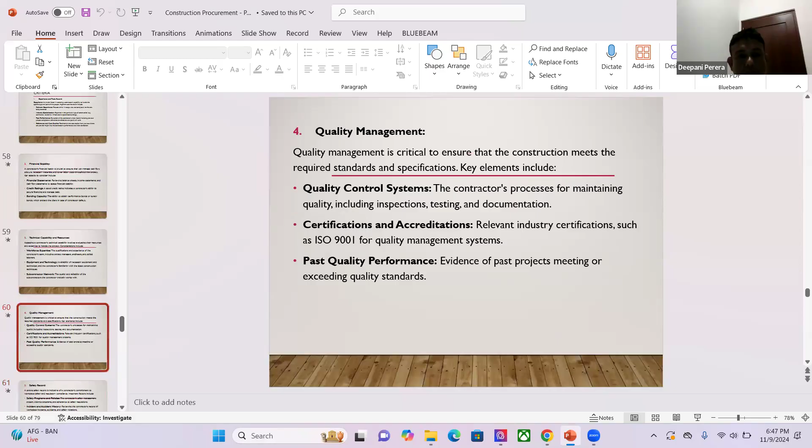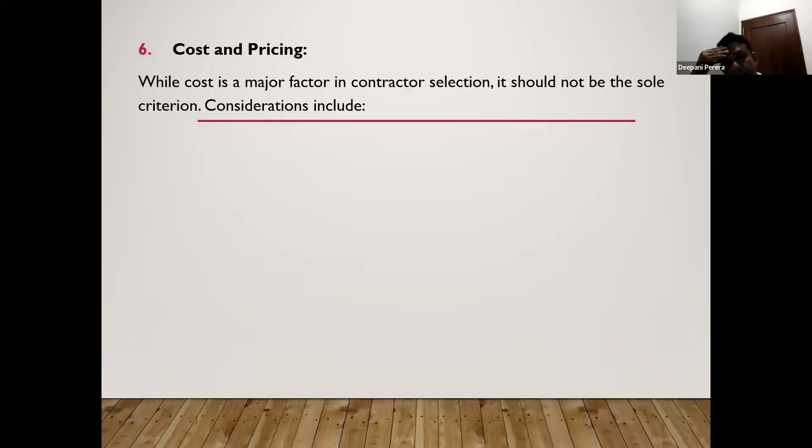So we will discuss the selection process of the contractors. These are the typical process. First, you have to pre-qualify your contractors. For example, some of the contracts.

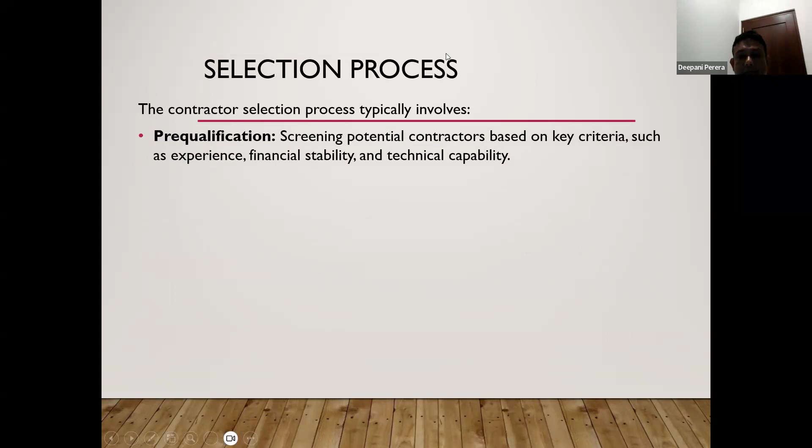You can listen to me, no? Yes, sir, we can hear you.

So in some of the contracts, you have to pre-qualify whether you have sufficient technical knowledge or capacity to deliver the project. Not only technical, but financially also you have to pre-qualify to do the projects, and also similar kind of nature project. So in some of the tenders, first you have to pre-qualify the contractor.

So therefore, financial stability, financial ratios, especially you may go through account ratios, liquidity ratios, liability ratios, asset ratios. You have to consider those things, financial stability, before awarding the project, and also technical capacity.

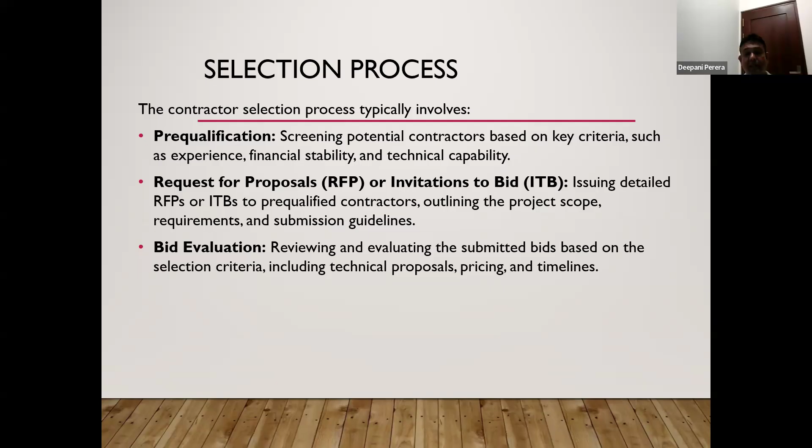Normally, with the bid, you have to submit a guarantee.

So the tender-wise, normally all the contractors after submitting the bid, evaluation is done. Normally in open tenders, the prices are exposed in the bid opening meeting. They will expose who are qualified by considering the bid bond and required documents. But anyway, bid evaluation is done during the technical evaluation as well, because the evaluation board has to sit together, review certain technical requirements and the price, and based on the technical proposal, they will evaluate the successful bidder.

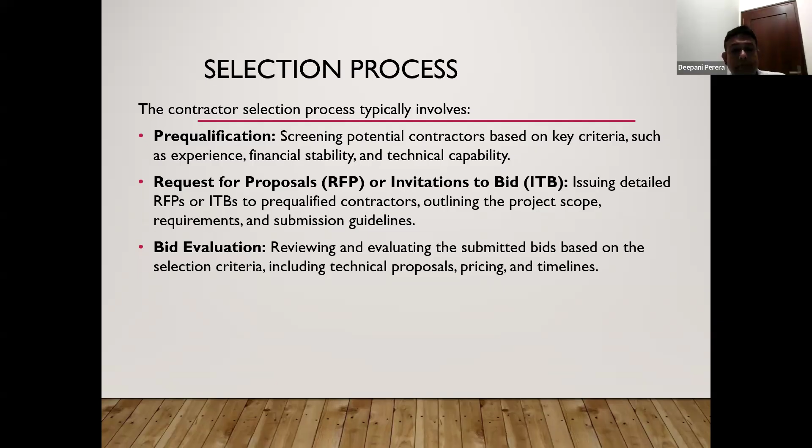Sometimes, most of the cases in private tenders, there are so many interviews and negotiations. This happens to negotiate the prices and also to get alternative methods. But most of the cases, it's recommended not to do any contractual agreement or contract changes; pricing negotiations can be done through negotiations and interviews.

After final selection, normally a letter of acceptance will be sent after confirming the final successful bid.

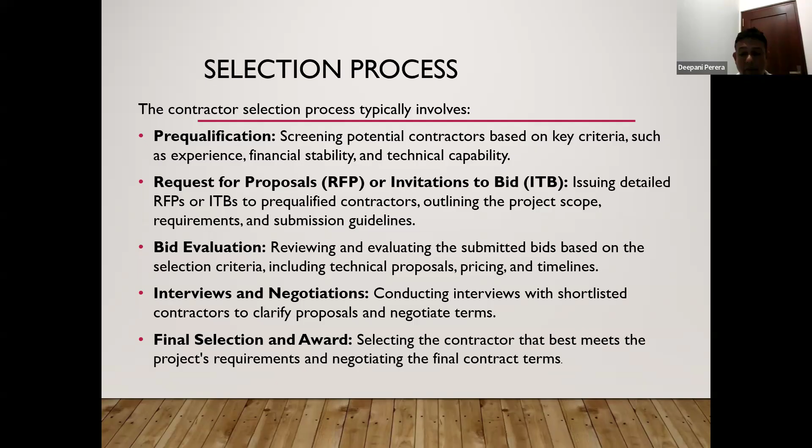Conditions in the procurement process: fair competition. What is fair competition? When you are getting the bid or quotation or calling for tender, you should have a fair number of similar capacity competitors. Otherwise, you can't get good, accurate bidding.

Integrity and transparency: all the details should be given to all the contractors in a similar manner. Call for the pre-bid meeting and give a detailed discussion with the bidders and share their comments. If some contractors ask questions through emails, they have to write in, in writing, to get the clarification.

Once the clarification is given, normally procedure is given to all the parties. Confidential - all the details from each bidder should be kept top secret, not exposed to others during the procurement process. And accountability - there should be accountability of the organization to keep it, and social responsibility, especially in government projects, to do a proper procurement process.

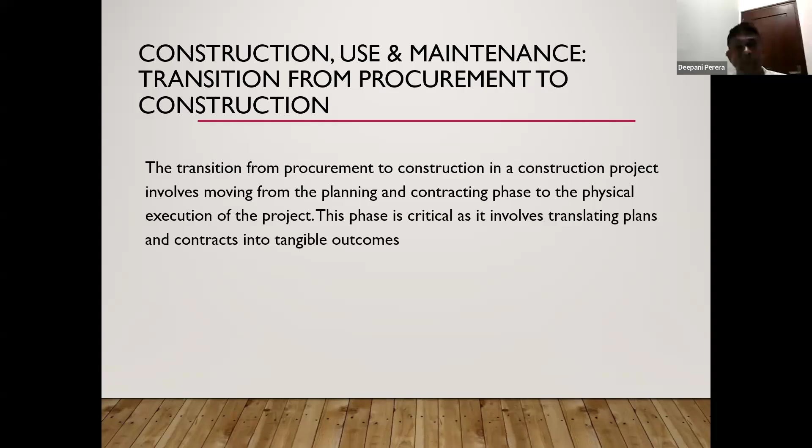Normally all construction agreements are considered as contracts. So anyone know what is the definition of the contract? Can anyone tell that? Manam Peruma? What is the contract? How to form a contract?

So not answering. So like this, you all are in the class, no? So, to form a contract there should be two parties, offer and acceptance in law. We offer and accept, but not only the offer and accept - there should be another important part: consideration. Correct, good. So to complete the contract, it should be offer, acceptance, and consideration. That is the normal way to form a contract.

So main contract - there are several contracts in construction procurement. Normally we call it the main contract, that's the primary agreement between the employer and the contractor. In this contract, normally we mention the scope of work, payment terms. There are implied terms as well, and the condition of contract, schedules, specification - all are included in the main contract.

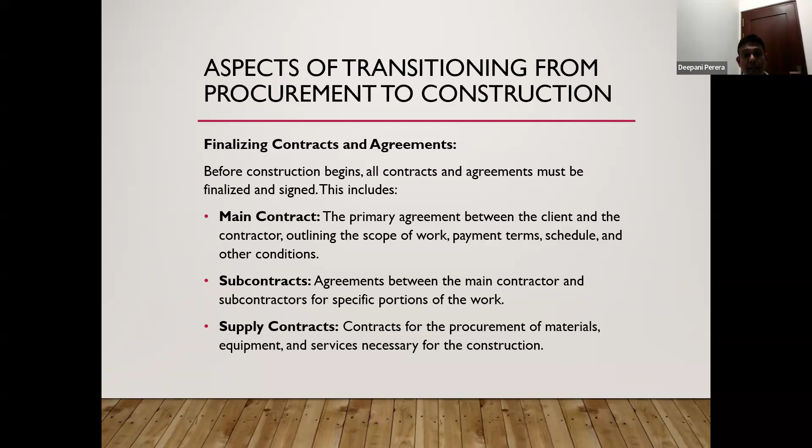Pre-construction activities - these are the basic things. You have to go through site preparation first. Before that, before tendering, you actually have to get the permit and approval. Without that you can't do tendering because sometimes the scope can change, but permit and approval should be in place. Site preparation should be done, and also the mobilization - mobilization means the contractor is going to site to start the work.

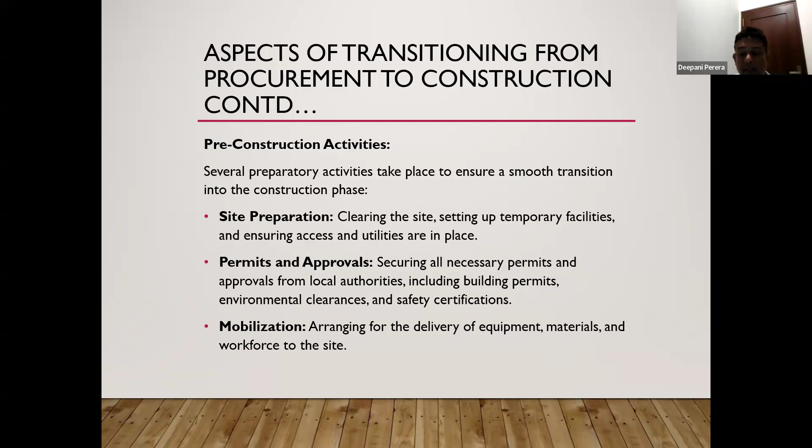Stakeholder engagement - there are so many stakeholders engaging in the construction project, such as the client and contractor coordination.

The contractor is liable to deliver the project, so therefore there should be proper communication between the client and the contractor and the project managers. Project managers or consultants facilitate the relationship between the client and contractor.

And community engagement - informing local communities about upcoming construction activities and addressing any current impacts. There are so many environmental concerns, especially sound restriction concerns. If you are doing a factory, there will be environmental factors. If you are doing a mall like Havelock City, you have to do the traffic impact assessment, because there can be traffic violations in front of the road and in front of the premises. So it's good to inform the local people before doing the construction work.

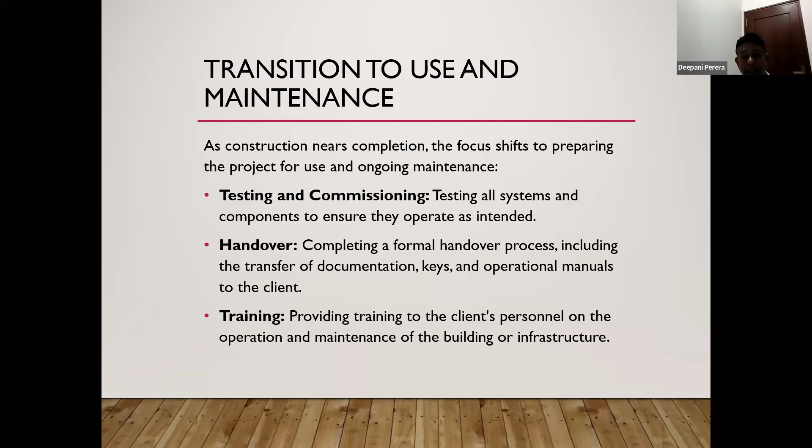Post-construction activities include the defect liability period. You know that for any product you have to give a defect liability period - a warranty - so if any defects occur due to construction, you give assurance to rectify them. The defect liability period is a period during which the contractor is responsible for correcting defects.

Normally this is 1 year. If you want, as per the contractual requirement, you can extend the defect liability period, but commonly it is 1 year, for the longevity and optimal performance of the facility.

So maintenance - generator, etc. After the 1 year, you have to do a final review and close out the project. You have to calculate the defects and missing or lagging work, and based on that, review the final outcome and conclude the project.

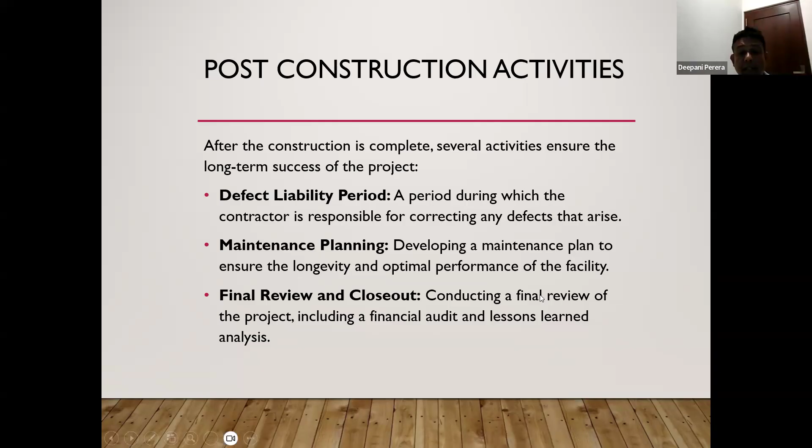Use phase and operational consideration. The use phase, also known as the operational phase of a construction project, refers to the period after construction is complete and the facility is used. This phase involves ensuring effective and efficient operation, maintenance, and management - after the defect liability period, the owner has to operate the building. That is an important part.

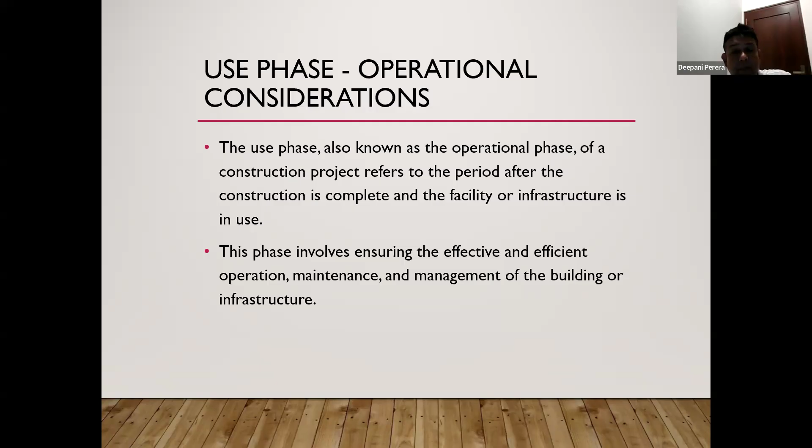Most apartment buildings have companies doing these management things - we call it maintenance, providing security, cleaning, putting oil in the generator. We call this facility management. You can see a lot of facility management companies doing maintenance work at the World Trade Center, Lotus Tower, Havelock City, and many other buildings.

I'm not sure about roads, but road maintenance work is normally done by the RDA. So day-to-day operational and maintenance work is done by the facility management team. They basically oversee daily operations as per requirements, and also building service and building system management.

Building system management means some buildings have centralized AC, which they have to monitor - maintaining carbon dioxide content and indoor air quality. For that you need qualified engineers or maintenance engineers to maintain it.

Also lighting systems - in the Lotus Tower, for example, the lights change. You also have to install energy-efficient lighting inside the building, and check whether they work properly with motion sensors - if not, you have to maintain them.

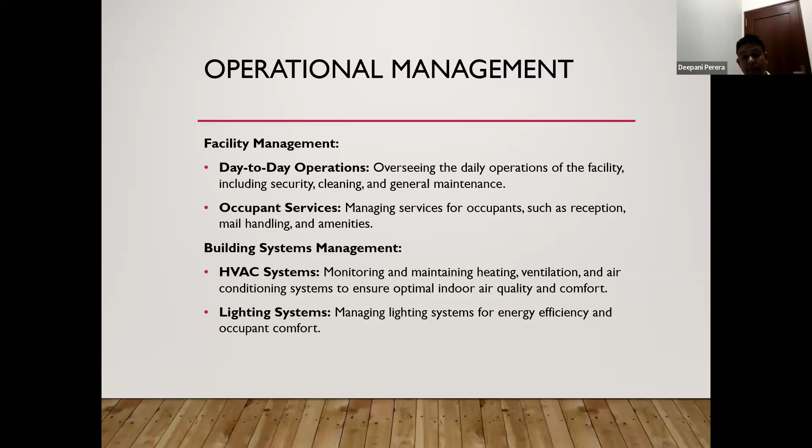Preventive maintenance - as I said, scheduled inspection, especially for lifts and generators, requires scheduled inspection. Routine services - you have to change things like vehicle parts, cables, and even replace lifts after 5 to 10 years. Sometimes you have to change the cable as well.

Also corrective maintenance - what is corrective maintenance? Repair works - if there's any repair needed, you have to do it. And also upgrades - sometimes the system may need to be upgraded.

For example, tell your pump is 10 horsepower. Sometimes you need to cater for adding pipe outlets, and you have to cater for 15 bar, so then you have to upgrade the motors.

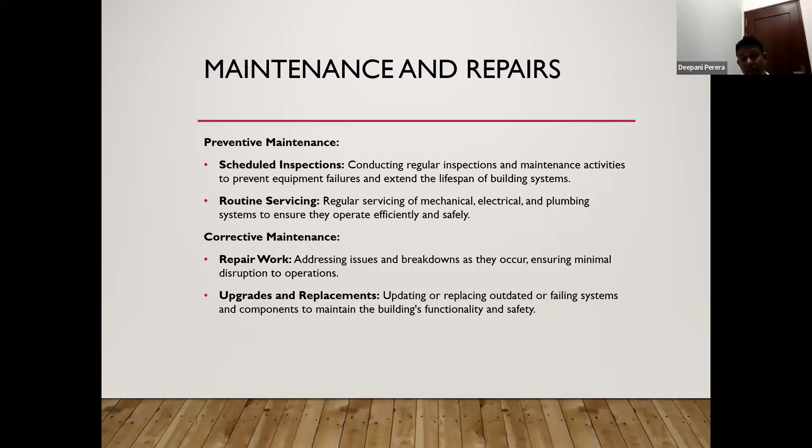Energy efficiency is part of sustainable energy management and sustainability, which is very important in buildings. You have to monitor energy use. Sustainable practices include waste management and water conservation - for example, you have to use rainwater for the irrigation system, recycling, etc.

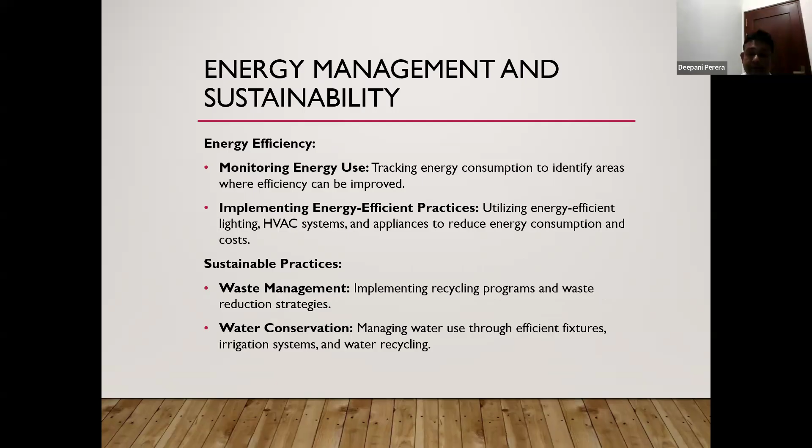Health and safety inspection involves conducting regular safety inspections to identify and address potential hazards, for example some oil leaks.

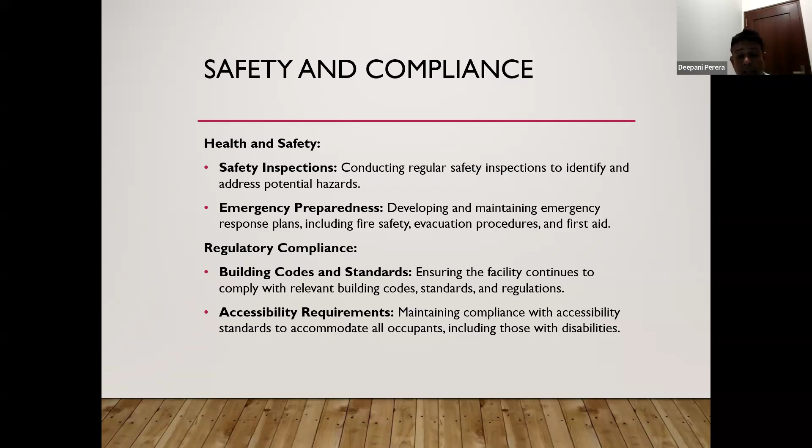Also regulatory compliance, building codes and standards. Sometimes, for example, fire standards may be changed, but based on the required law change, you have to change it. Also there are different gazettes for the disabled, so accessibility requirements are most important when considering compliance.

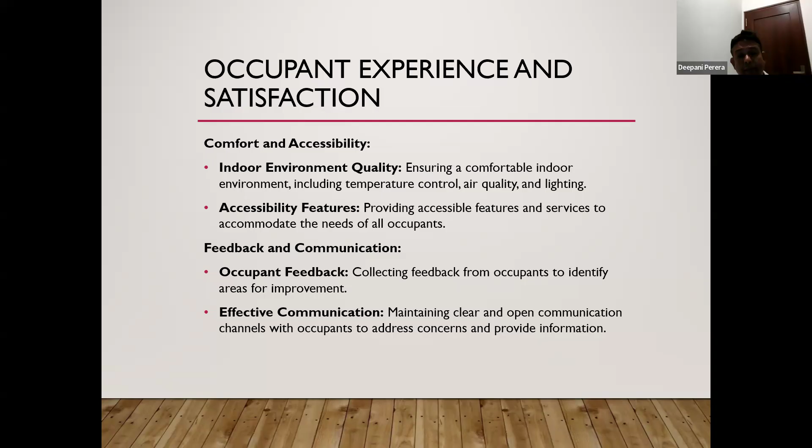Comfort and accessibility: indoor environment quality should be perfect. Accessibility features mean providing features and services to accommodate the needs of all occupants. Also it's better to get feedback and communication from the end users.

So that's the first part. We covered basically these contents, and now I want to discuss your assignment.

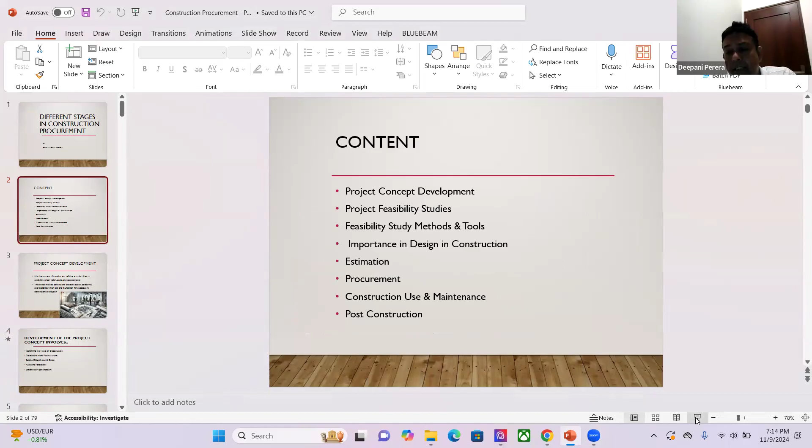I will base your assignment on the project proposal, which expects a private company to implement it in the future. In that case, you have to...

write an individual report considering project concept development, and also critically discuss the feasibility studies and which kind of contract they should go for and how to procure the project.

So that will be our assignment from my side. Basically, you have to write around 1,000 to 1,200 words considering the proposal.

Maybe it will be for a service building or an apartment. I haven't decided yet, but basically you have to write especially the concept development considering the client requirement and other third party constraints as well.

So it's not just about how to implement the project, but also which kind of contractor you're going to procure. Your decision and conclusion will be like that.

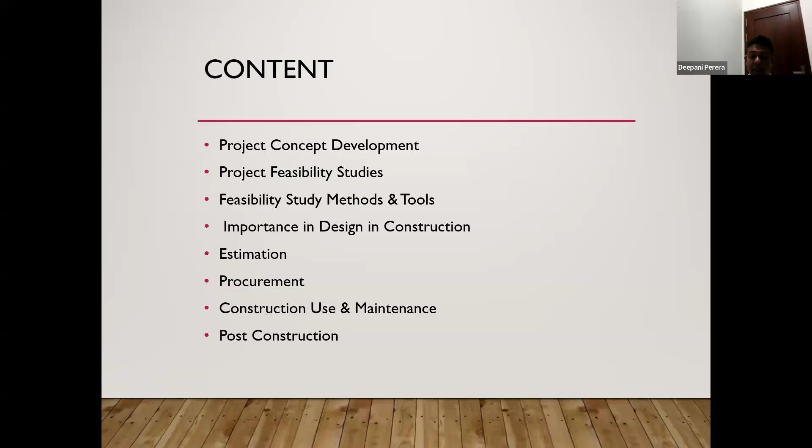Okay, we'll go to part 2.

Documents related to construction project design. What are the documents you know for the construction project?

Maheshi? Drawings, specifications, agreements, MOU, LOA. Right, good. So those are the documents related to construction projects, but how does it come from?

Normally, it should be a project brief and scope document. As I say, normally the client's vision or objective is defined first from the project.

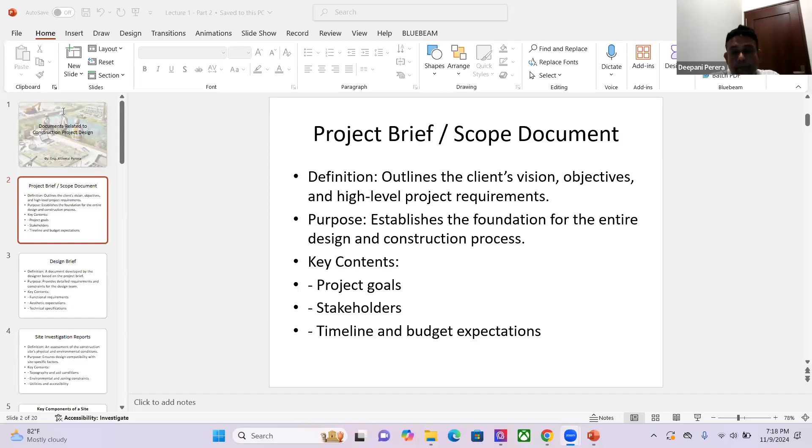As I said, the client gives the requirement objectives. Based on that, the consultant or design engineer establishes the project scope. In this project scope document, project goals are most important, along with who the stakeholders are, and the timeline and budget expectations.

Project goal means, for example, one hotel client, a hotel investor, wants to build a hotel on top of a railway station. Then there will be a lot of stakeholders: designers, the railway department, road development authority, and on the design side, engineers, project managers, architects, quantity surveyors. They are the stakeholders, and also there are suppliers and subcontractors.

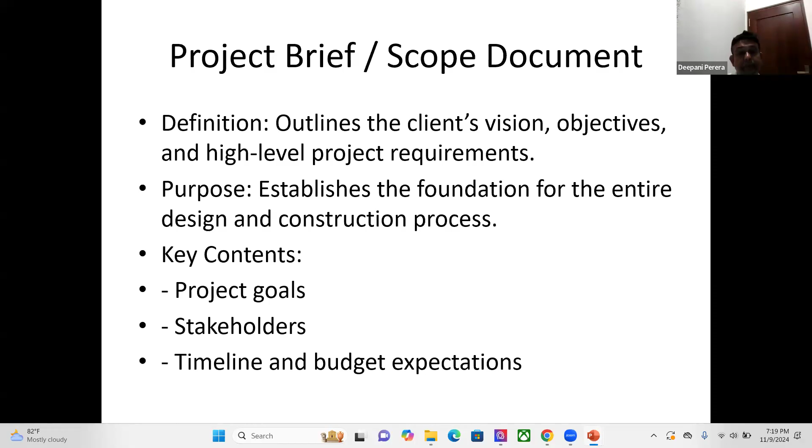What is the design brief? This is a document developed by the designer based on the project brief.

For example, recently I visited one of the private organizations to do the office building for them. I went there with my architect.

Earlier we had a small discussion with them. They said they need 6 car parks, and they said they need 4 floors for the office. So based on that, as designers we have to prepare the document for the developer, and develop the design brief on how we're going to allocate these client requirements.

So the purpose is to provide detailed requirements and constraints to the design teams. For example, the constraints: in that discussion they said you can't go for the basement, because there are 2 old houses there, so you can't build the basement. Constraints like this you have to mention to the design team.

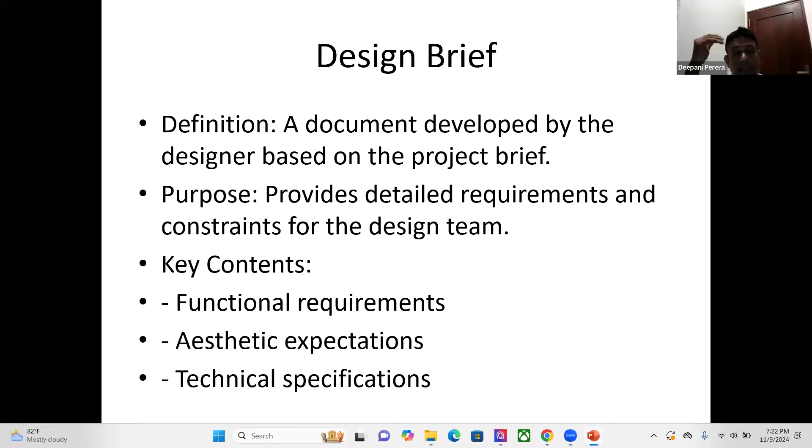Sometimes, as I said, they will give technical specifications. Especially, for the Lotus Tower, they said they need high speed lifts in the country. Likewise, they give special technical requirements for the project.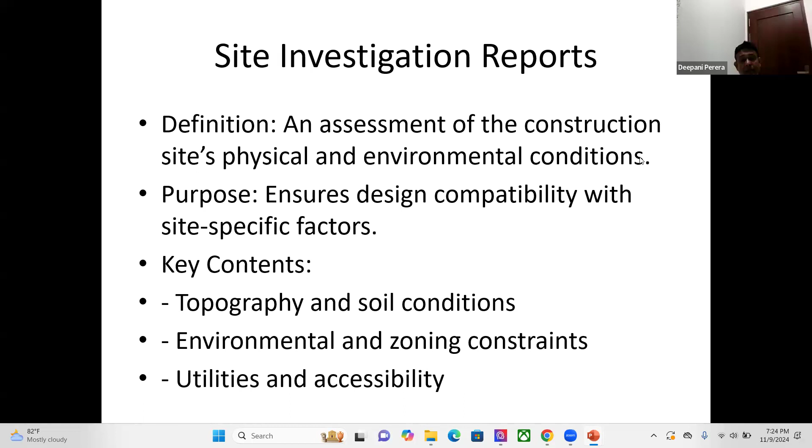Planning clearance - do you know the PPC? Anyone know about the PPC? What is the preliminary planning clearance? Before you do the designing, you have to know about this.

For example, think about you have a land facing near the airport, land in some special location, then you have a different frontage of the land - what is the width for the face into the road. These kinds of factors are affecting the construction of the building.

So before you do the designing, the normal procedure is architects get the preliminary planning clearance by applying through the UDA. They will give how many stories based on your plot ratio, road frontage, construction area, and where the proposed land is situated. Based on these, they will give clearance for how many stories you can do, and how much setback you have to keep. Likewise, these are through the PPC.

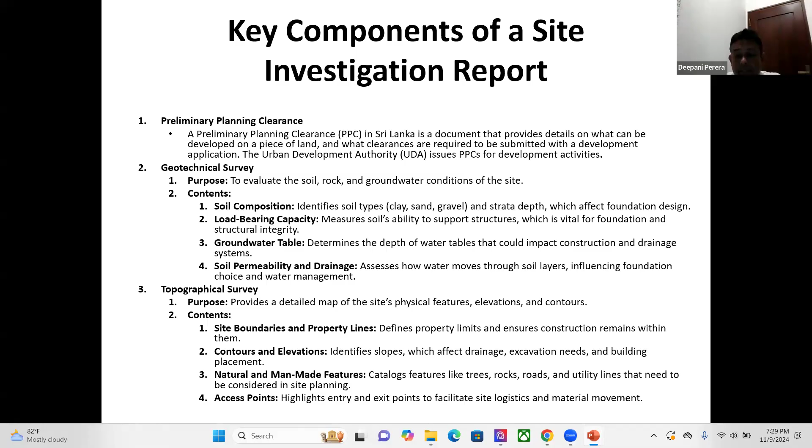Environment assessment - anyone know about the environment assessment? It ensures that the project complies with environment regulations and reduces environmental impact. Most mega projects require an environment impact assessment. This contains existing flora and fauna, identified vegetation and animal life, and could require preservation or relocation. As I said earlier, we have done the Hilton Yala project.

In that project, we provided an elephant path to move the wild elephants, and also we made ponds for them to drink water, and we cultivated trees because we cut a few trees, but did not cut the root ball - we removed them from one side and relocated them to another.

And especially in the factory building, noise and air quality assessment, you have to do. In the hydrological survey, especially hydrological survey is required for the power plant, mini hydros, you have to do that. Surface water flow, flood risk, drainage system, etc. you have to do.

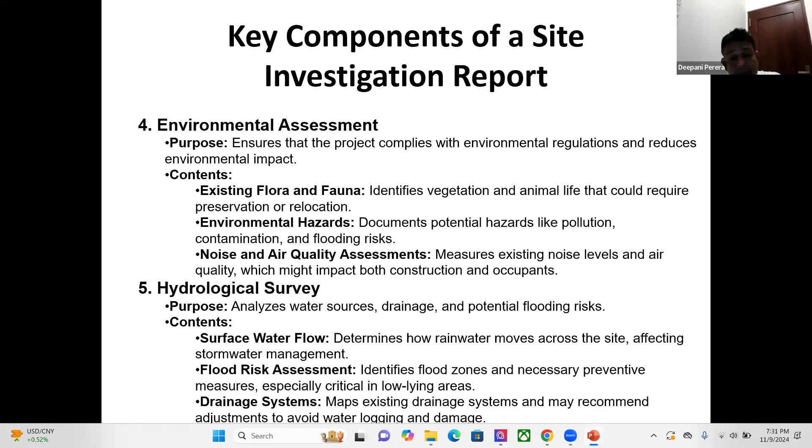In hydrological survey, especially in that mini hydropower project, you may know that you have a culvert, tunnels, channels, and a forebay tank, powerhouse. So those should be located based on the hydrological survey, because of the flood levels it can be damaged. Based on that proper analysis, you can construct those activities.

And the other thing is historical and archaeological studies. The purpose is to identify any historical or archaeological sites that require protection. You know that in one project, near there was a building - earlier City Police was there. That building was an archaeological, more than 100 years old building. So we cannot remove that one. In that case, we have to protect that building.

And also we have to consider that as a design. So the 3 towers were constructed without disturbing that. So the piling also designed not to touch that historical building.

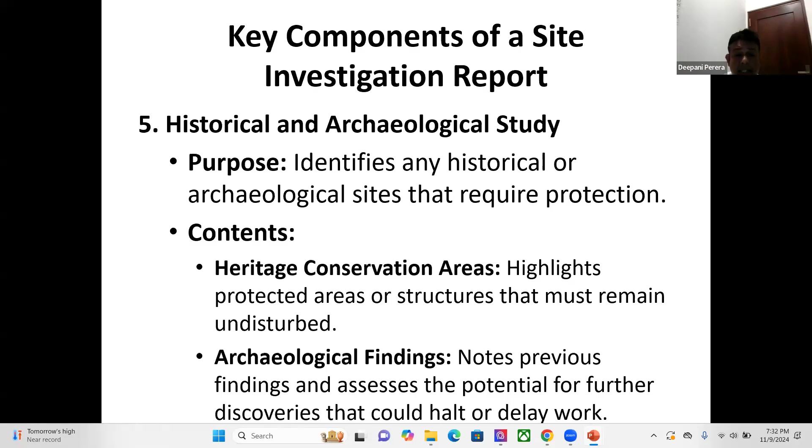So the heritage conservation area highlights protection, especially when you are doing structures in Anuradhapura, Sigiriya, you have so many restrictions. Archaeological findings, especially when you are doing excavation near the heritage archaeological area, you have to take special care.

So what are the benefits of investigation report? First thing is risk reduction. It's very important to identify the risk. For example, as I say, identifying the rock.

In the Colombo Lotus Tower, we have done around 20 boreholes to identify the rock level, because in the Lotus Tower project we have to excavate the tower foundation up to the base. So to do that, we should have proper identification of the rock. With the site investigation report, we got enormous details on how the rock is under the soil.

So that is one thing. Other thing is there can be unexpected boulders, rock. For example, when you are doing the tunnel project, there can be rocks at a very shallow level. Then you have to blast - those will be extra cost for the project. So to identify these things, site investigation reports are much vital.

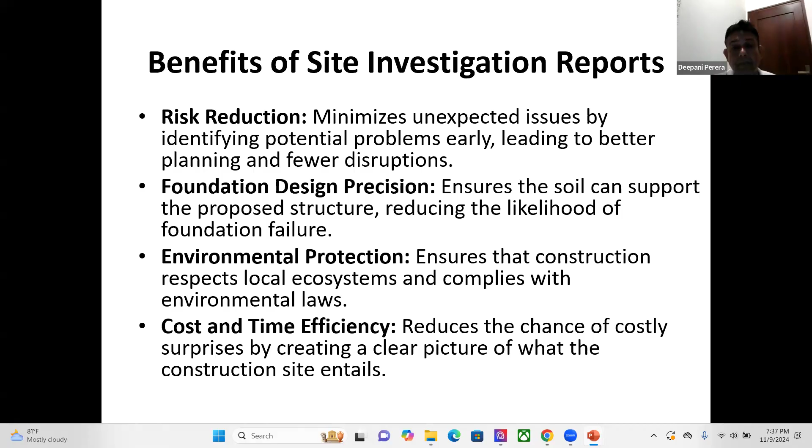Application in the design and construction. So basically this is...

Based on the site investigation report, you have to identify what is the foundation design. Basically, with the site investigation report and soil investigation, you have to design the foundation based on which kind of structure you're going to construct.

For the road, you are going to do the construction of a road. Then you have to identify which kind of fillings are needed to accommodate the highway. Likewise, the site investigation report is more important to identify the soil condition, and based on that, foundation and structural design will be done, especially the foundation. So foundation design will be done using the soil investigation report.

Drainage and landscape, as I said, in the Nuwara Eliya area or Nuwara Kandy area, topographical and hydrological survey help design effective water management and landscape. So landscaping outside of the building, how to do the designing, that topographical survey is most important.

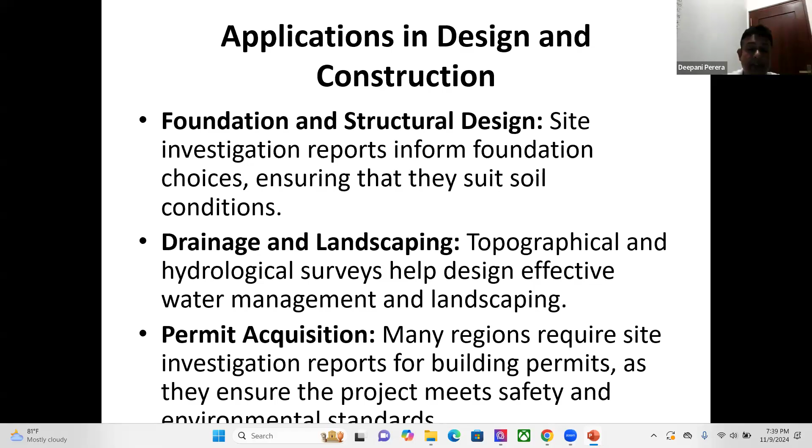So, feasibility studies. It's an analysis of the project viability in terms of technical and financial feasibility. The purpose is to determine if the project is achievable within the defined constraints.

You know, say I am going to do a construction with 100 million. Because of the site investigation report, I have to do soundproof walls around the building, and also the foundation should be a pile, not a raft or individual footings. That will be a huge cost. So then we need the feasibility study. It's important technically and for financial feasibility as well, because technical feasibility directly impacts financial feasibility.

The key contents of the feasibility study are the cost estimate, risk assessment, and financial and timeline forecast.

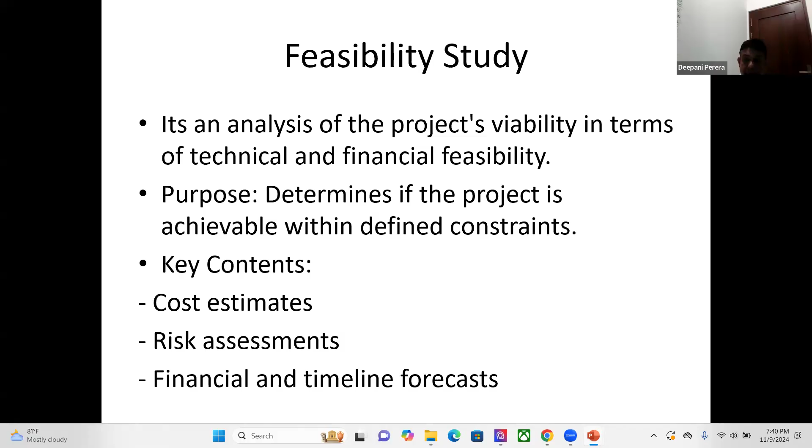They are doing sketches, not 3Ds. Nowadays, a lot of new architects are doing 3Ds. Earlier they did sketches for the project, and the basic requirement is to visualize ideas and refine client expectations. Nowadays you can't just do sketches. You can start from sketches, but you have to give a proper 3D, otherwise the client will not be impressed.

To get client approval, you need 3Ds, you need walkthroughs, you need advanced technology software to create the models. Otherwise, they will not approve your concept. Earlier, most architects would construct a model as well - portable models they are constructing. You can see some architects still doing this.

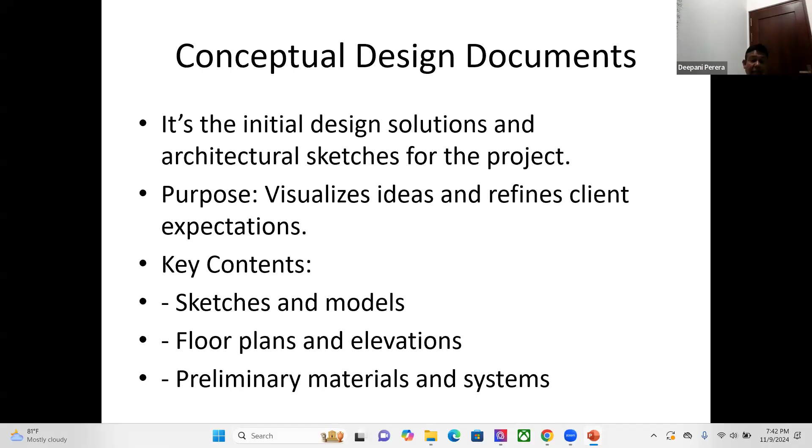So in this document, you have to give the sketches, model, floor plans, elevation, what are the materials. When you are doing hotels, for example with a high quality operator like Hilton, Continental, or Marriott, you have to give material samples - which kind of material for your bed, what tiles for the bathroom, what carpets, backdrop, bed head design, samples, materials. You have to give it and show it to the client before approving.

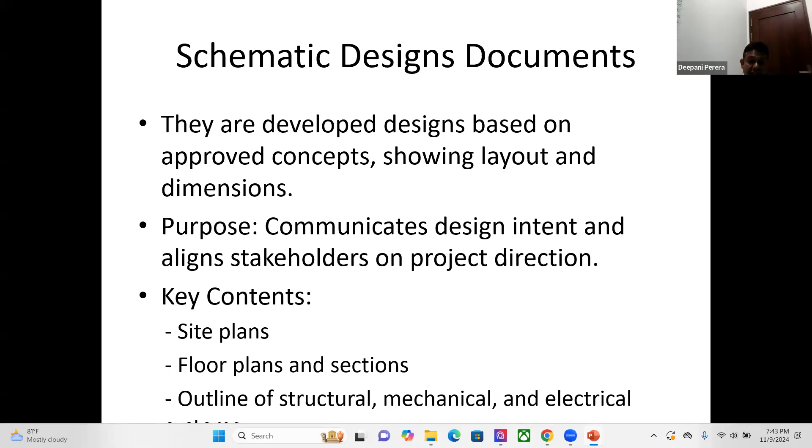After that, you have to do the proper design development document. These are detailed designs addressing specific systems, materials, and layout. This is most important to do the costing for the QS in the tender stage. You need proper detailed design, including specification, system, material, and layout. The purpose is to resolve major project design issues before the final design stage. The key contents of the design development document are detailed plans, elevation, material specification, structural, and MEP details - what is the slab thickness, beam size, floor to floor height, everything is included in the design development document.

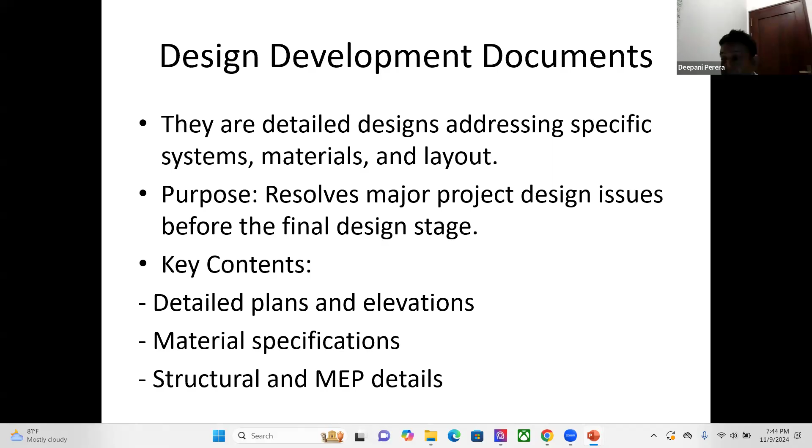After completing this, you have to do the construction document. This is the final document, fully detailed document that guides the construction.

This gives all the instructions for the contractors and subcontractors, detailed drawings, plans. For example, how to lap the reinforcement, how to anchor the reinforcement, what is the anchorage. So many minor details you have to include, like tile grooves and tile patterns. Normally in detailed drawings, you have to give a tile layout as well, material, finishing schedule, etc. You have to provide in the construction document.

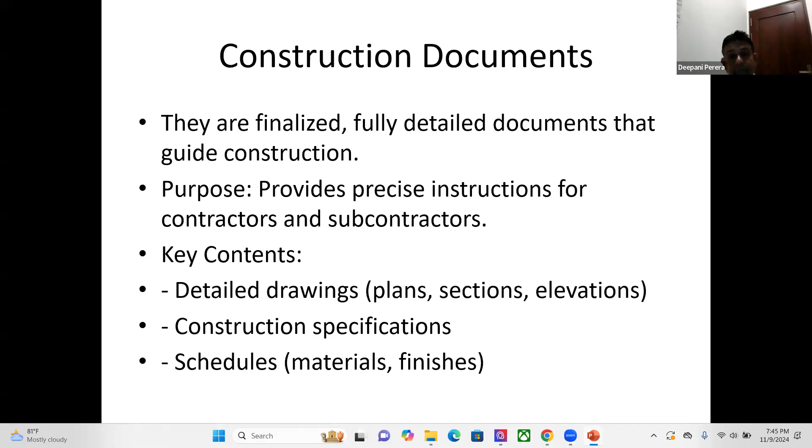What is the specification document? That is another thing, because most of the contracts have the design document, and with the construction document you will get the specification document. Sometimes for a mega project it's a huge book. For the Lotus Tower, the specification book is more than 1,000 pages. So it's a detailed written description of the material, product, and workmanship, the expected quality and consistency throughout the construction.

For example, concrete specifications are given - this test has to be done, this kind of material you have to use, this kind of cement you have to use. In detail it mentions, and based on that the contractor has to perform the contract. So these are the specifications: performance specification, prescriptive specification, proprietary spec.

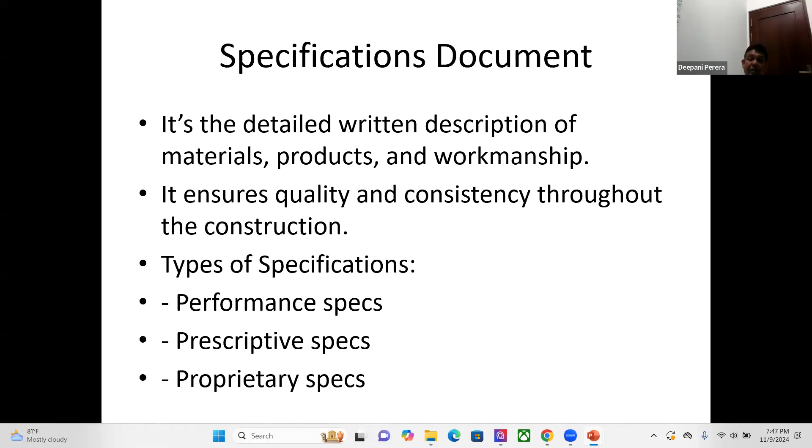What is the proprietary spec? Normally proprietary spec is something like this - you can specify the paint, like a new CIC paint or equivalent. So you give the sample, brand-wise you give samples.

So this is the bill of quantities in the construction document. Bill of quantities is, most of the measure and pay contracts you have a bill of quantities, and also the lump sum contract also you have a bill of quantities to get the idea of the price. Bill of quantities we call BOQ.

So, anyone here from a QS firm? Anyone is QS? Yes sir, I was. Alright, so you are much aware about preparing the BOQs, no? Yes. So it's very important to develop a BOQ, detailed quantities of materials, unit rate, total cost, allowance.

And the provision of sums. So in the bill of quantities, it should be more accurate, but there can be a slight tolerance plus or minus 5%, but it should not affect the major cost components.

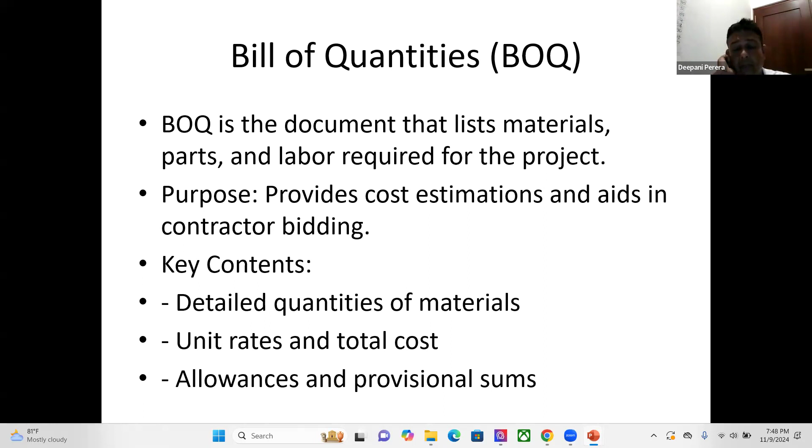So this is a new technique, but actually this is not new now. Most companies are now dealing with BIM models, building information modeling documents.

Recently we have applied to convert the Bandaranaike Airport existing building to the BIM model. So what is the BIM model?

This is a digital 3D model that includes detailed information for project coordination. The purpose is to enhance collaboration and provide a comprehensive overview of the project. So that means it's not like AutoCAD or SketchUp.

So normally for the BIM model you have to use proper software like Revit. Normally I am using Revit to do the BIM models.

This is because all the consultants can work on the same platform. First the architect develops the building, then the structural engineer can do the structural design using his model, then the MEP engineer can do the MEP design. The quantity surveyor can extract the quantities through the model, and also you can get the design visualization.

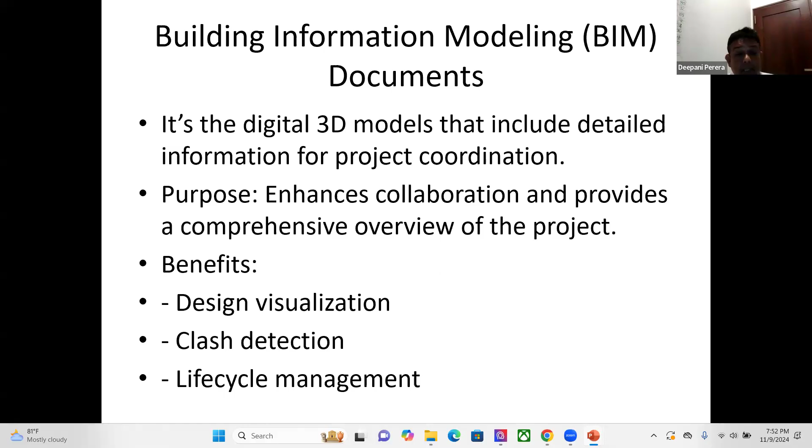Other thing is the regulatory compliance documents. These are the documents you have to involve in construction and design projects, ensuring the project meets local building codes and regulations. The purpose is to avoid legal issues and project delays. For example, nowadays most buildings require sign off from a proper structural engineer, then you have to get approvals from NBRO, UDA, and proper calculation has to be given.

These days NBRO is thoroughly reviewing your excavation retaining system because a few buildings are damaged due to contractor failures and designer failures. To avoid that, NBRO thoroughly looks at the calculation report. This also includes the permits and approvals, environmental impact assessment, safety and accessibility compliance, design calculations, etc.

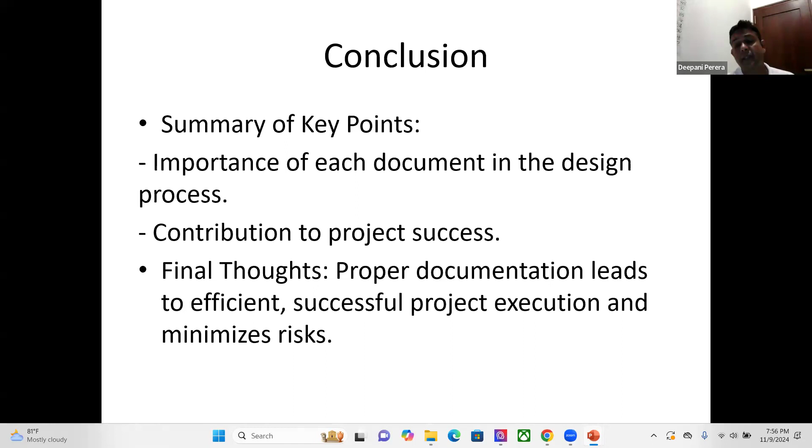So for successful project execution, you need proper documents. That is one of the key requirements because for the procurement stage-wise also you need this document to procure the project.

So any questions on the design documentation related to design and construction project designs? These are the documents - I didn't go through the structural drawings. I assume you have seen all the construction drawings, those are highly technical, but at least you have to know about the structural drawing, architectural drawing, MEP drawing, etc. These are the documentations you come across through the construction period as construction documents. Any question from you?

Okay, so we can close it in another 2 minutes. You have another lecture at 8 o'clock now? Yes sir, we do. Yes, okay.

So another 3 hours left from me, so I will do the estimations part and also that assignment. I will basically give you the assignment - you have to discuss, as I said, the feasibility studies, project briefing and selection, procurement contract methods, etc. I will circulate it through the course coordinator. It will be 1,000 to 1,200 words - it's not a difficult task. From my lecture part 1, you have to write the assignment.